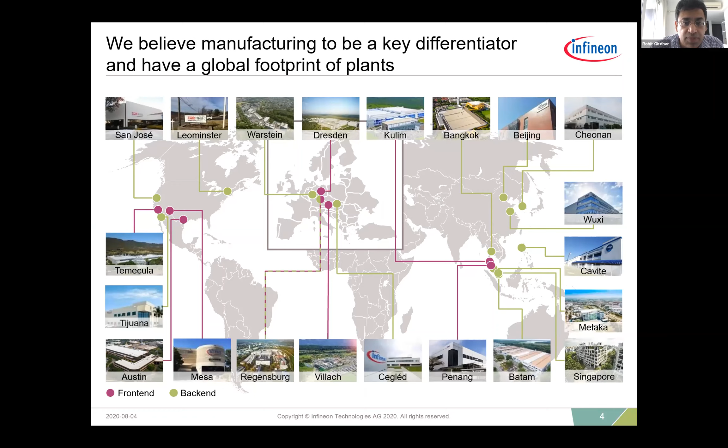We added a lot of corporate functions, we added a lot of support functions, design activities, but also increasingly our manufacturing setup in Singapore became more and more cutting edge. Over the last 5 to 6 years, we have actually invested significantly in manufacturing in Singapore, which has brought about a lot of usage of robotics, automation, AI, and digital tools.

And going forward, this trend is expected to continue because the Singapore plant for us is actually one of the lighthouse plants. And it's the only factory of its kind which is actually used for testing microcontrollers for automotive applications.

Next slide, please. And I think for most of the entrepreneurs and startups on the call, Industry 4.0 is not new. Everyone knows that the world had previously undergone 3 industrial revolutions, beginning with the application of steam as a source of power, to the assembly line, which was invented in the US by Henry Ford, and then moving on to computers, and now the 4th industrial revolution.

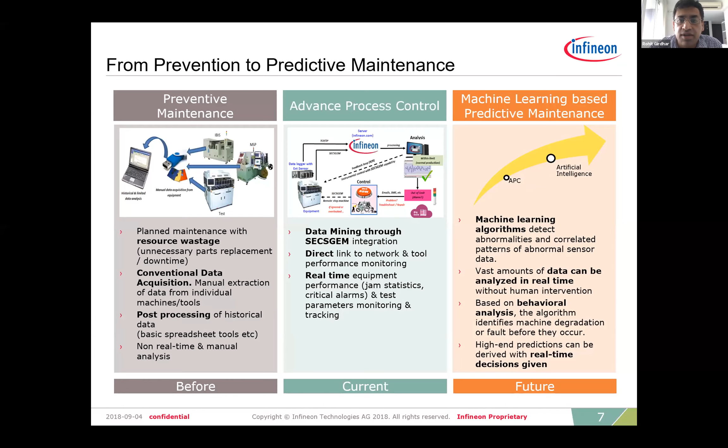And to now, basically, where you are beginning to leverage even more predictive tools, you're leveraging the power of AI and so forth. And these are actually real live examples in our factory. So this is the first one. It's an example more from the software side of things on how we are leveraging software tools and algorithms to help us better this. Next slide, please.

And this is another example, again, from our smart factory here in Singapore. So this actually shows you all the various ways in which the shop floor itself has been transformed. So you have a variety of technologies which have gone into this space in terms of automation, whether it's material handling systems, moving things from arrival all the way to our factory floor, or whether it is actually motion on the floor itself. There's a lot of automation technologies which are now built in. And this is also another interesting example. Next slide, please.

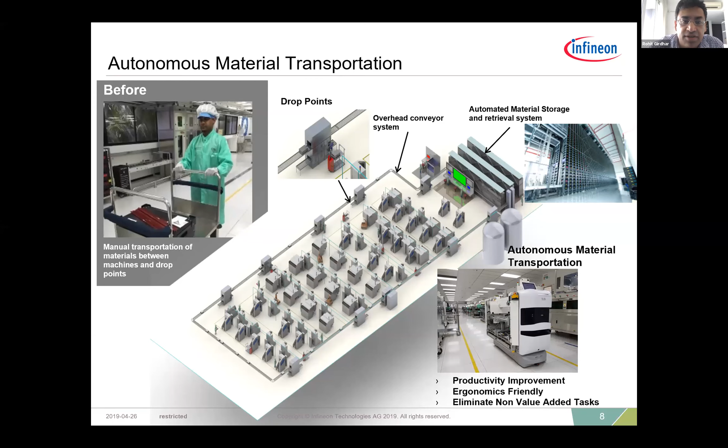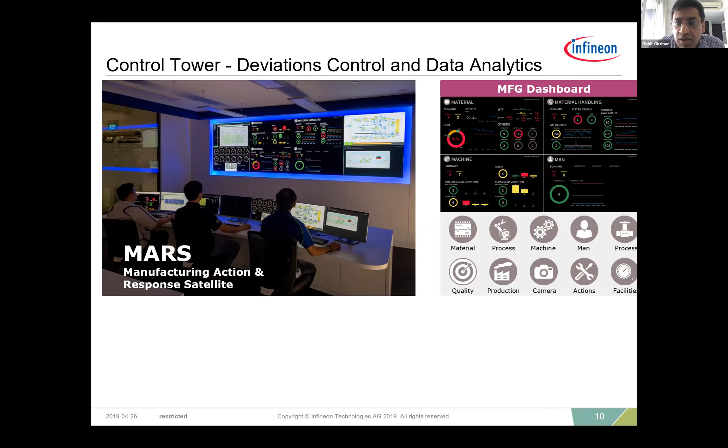Next slide, please. And this is actually something which we are incredibly proud of. This was actually put together by the team here, and it's unique for Infineon among its facilities worldwide. It almost looks like an airport control tower. So it basically gives you real-time information on a variety of metrics, how things are doing, what is going right, what are some of the potential flaws which are occurring, and all this in real time.

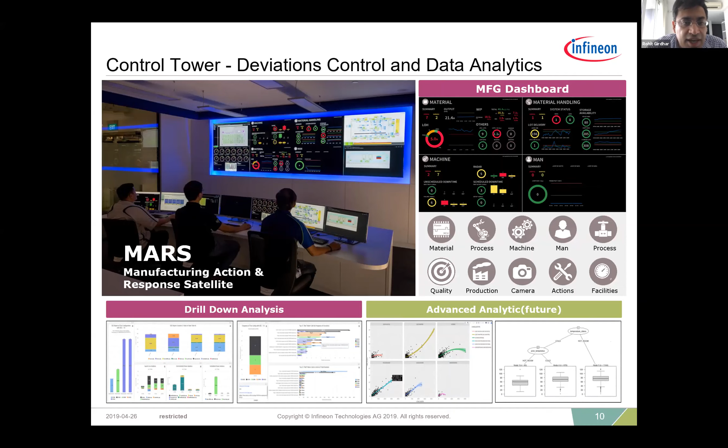So it's a dedicated setup which we have here, and it relies a lot on sensors and requires a lot of data being fed in real time. So it's a combination of hardware and software systems. Next slide, please. Right, so those were 4 examples of some of the ways in which a smart factory operates and how technology is being used to improve processes, to improve material handling, to improve communication, and also to improve monitoring in real time.

So this is an example where a partnership has occurred between Infineon and a local startup called 6th Sense. Next slide, please. And this is an example which is more on the hardware side. So actually what you see here is Infineon working with 3 different partners. One is obviously Xnergy. Xnergy is also a local startup here, and it makes very highly efficient wireless charging solutions. And these solutions are used for autonomous guided vehicles on manufacturing floors. So that was one of our partners which has been working with us on this.

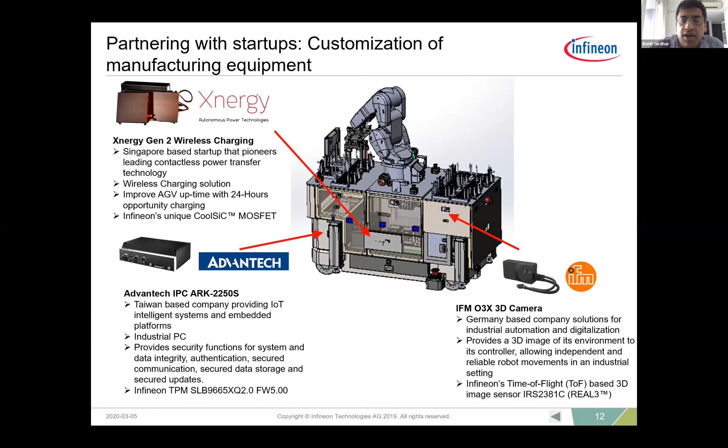Right, and maybe you could click through. Yeah, so more broadly, for those from the startups who are on this call, how does Infineon engage with startups? Yes, the technical part is one aspect, but how do we actually get to that partnership level? Well, there is a step-ladder approach which Infineon pursues. We are not so focused on investing in startups. We feel that is something which is better done by financial investors as well as by venture capitalists. So we focus more on enabling startups through partnerships.

How does this begin? Well, it begins on the lowest level where we engage with a lot of incubators and accelerators, and we introduce our technology. We do seminars, we share know-how, to more involved partnerships where we would then jointly define projects with a few selected startups. These may actually be either paid pilots, or a mutual exploration of topics. And last but not the least, as we go to the highest level in this step ladder, we have our own space here in Singapore called the co-innovation space.

So in this model, actually, the startup which is working with Infineon moves into our space for a period of a year to slightly more than a year. It could even be 9 months in case it's a very short project. We work together on a mutually agreed plan with clear milestones, and the startup actually stays in this space so that they have very good collaboration opportunities with our engineers.

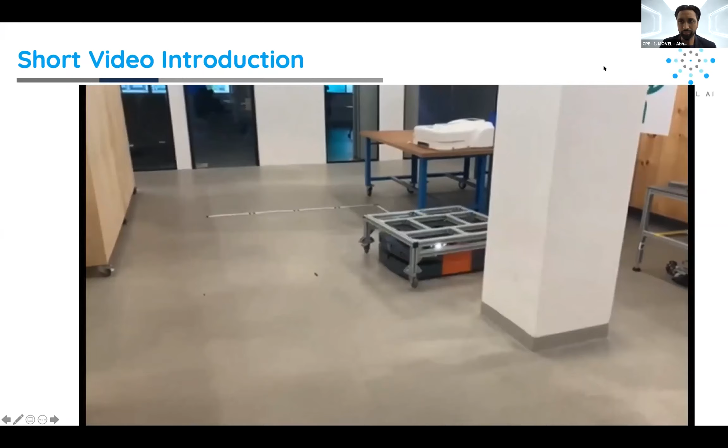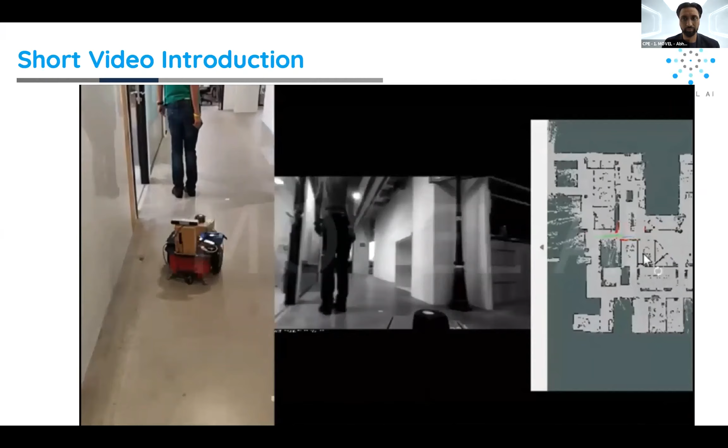In this section, green dots represent the objects which were there previously, whilst blue dots represent new objects just like this person. From these dots, our system extracts a pattern and defines a shape for each object. Once combined, you can see the robot in action on the left, the camera map in the middle, and the LiDAR map on the right. Initially, the robot avoids the obstacle by moving to the left, but now, when there's a glass wall on the left, it moves to the right as there is no space. The robot stops if the destination is occupied.

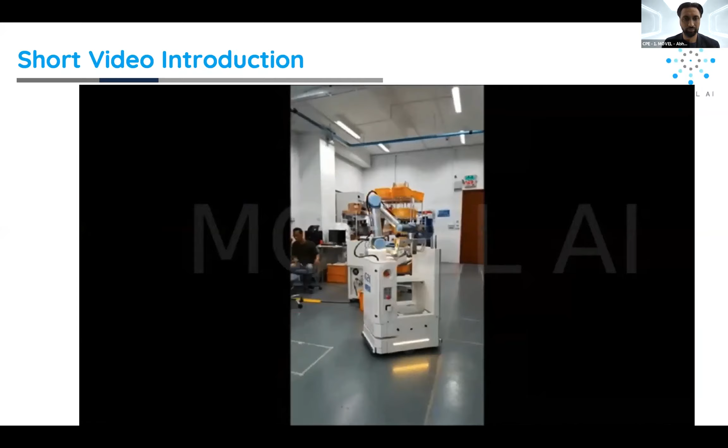Here's an example of our customers who have used our solution for robots operating in the wafer industry, where the environment is dynamic and accuracy is paramount. We have worked with clients in the hospitality and service industry.

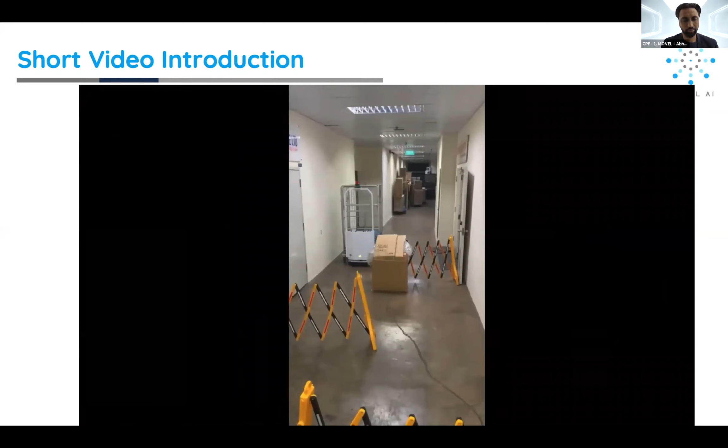In this video, the robot was assigned to go to different rooms to deliver items. The robot is able to dynamically avoid people even if they suddenly jump in front of its path. No matter how rough, dynamically changing, or narrow the path is, our navigation system can navigate any robot, big or small, to the destination.

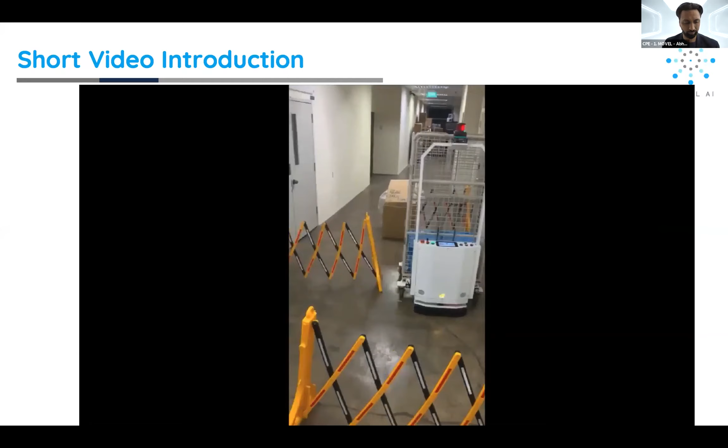In this video, you can see a series of obstacles, and the robot generates a smooth path to avoid them. Our unique sensor fusion algorithm using computer vision and LiDAR allows us to identify different objects. It dynamically switches reliance between different sensors based on the surrounding environment.

So robotic navigation technology has been there previously as well. People were using 2D LiDARs or line following, and some of them are using pure camera. There are some different issues with that. Suppose you are using line following, it cannot do obstacle avoidance. If you are using 2D LiDARs, it cannot work in dynamically changing environments.

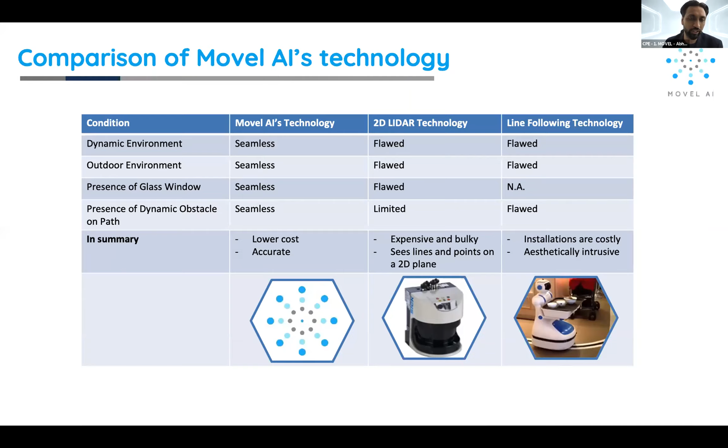Because we are using sensor fusion, we are able to overcome all of these. Not only that, we are able to use camera plus LiDAR. Because of the camera, we can get the shape and size of the human being, and if you want to follow the human being, we can do that. Secondly, we do not need any infrastructure changes, which means that we can extract the features from the space itself.

Our software is called Sirius, named after one of the constellation stars used for navigation. When we provide the software to our hardware robotic companies, they get a navigation system. It can handle glasses. It can handle multiple maps, multiple floors. It can detect obstacles, and it comes with a very good user interface. Because of this, it becomes very robust to be used in many different segments.

It is quite accurate, with an accuracy of about 2 centimeters. We are doing everything on board. We are not doing anything on cloud because of latency issues. We have optimized the code in a way that everything runs on the processor, and our software can be put on any kind of robot. That gives us a variety of markets to open into.

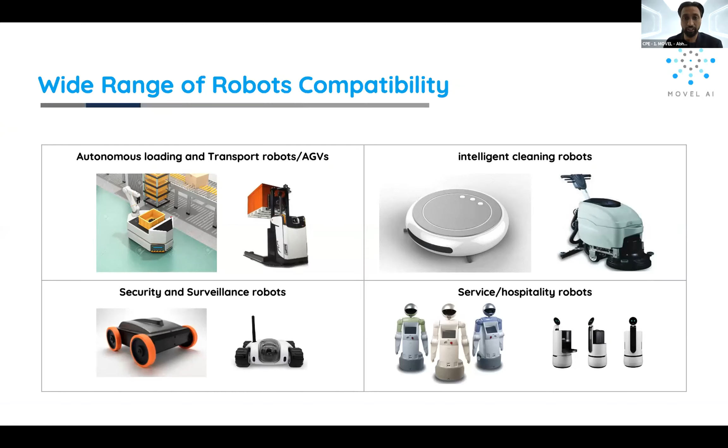Our software can be used in transport AGVs, cleaning robots, security robots, and it can work with service robots. We'll give you an example of how it has worked. Currently, we can work with robotic companies who have no navigation systems, who are working with magnetic tapes, or have some camera systems. We are also partnering with sensor companies to provide our software with their sensors, and working with end users and partnering with hardware companies to give a whole solution altogether.

Normally we charge a one-time integration cost, and then there is a licensing cost per unit. There are cases where there is no need to pay the integration cost also. If your system is ready, you can just take our software, ready to install. From our past clients, we have worked with robotic companies as well as end users and provided solutions to both of them. Currently we have about 14 full members working on this, with a heavy focus on software development.

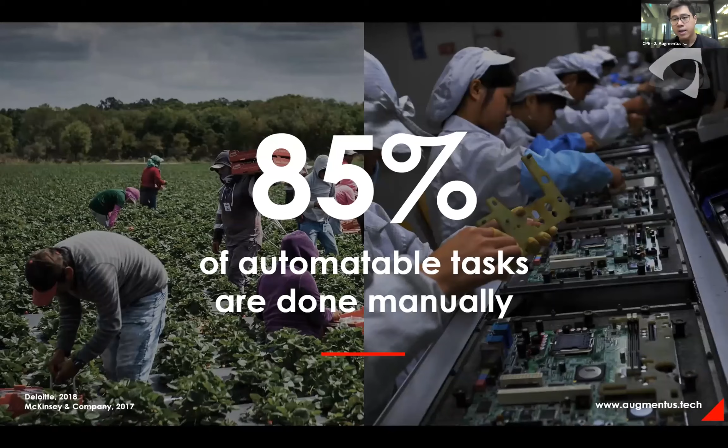Imagine that you want to adopt a robotic system. First, you have to purchase hardware and handle maintenance costs. But most of the cost actually stems from the software and integration side, and that alone can cost over $230,000 over its lifetime. The reason for this high cost stems from four key aspects. Robot programming software, like OLP software, is very expensive and requires high levels of technical expertise to operate. So you will need to hire or outsource robotic development.

Furthermore, different robotic brands use different programming languages. In fact, there are over 30 different programming languages in the market today. And CAD files required for programming are not always available, so you need to outsource CAD file development. That costs thousands of dollars per part. And lastly, if you would like to have intelligent-based dynamic automation processes, it's currently a very fragmented and complex procedure.

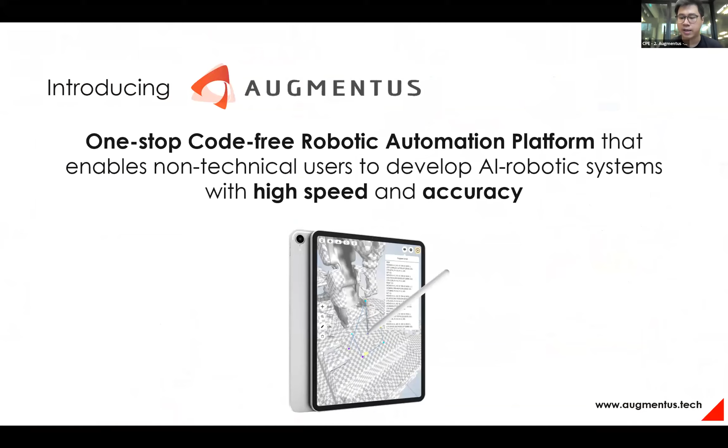Introducing Augmentus, a one-stop, code-free robotic automation platform that enables non-technical users to develop and operate AI robotic systems with high speeds and accuracy. We are a full-stack platform that simplifies and unifies industrial automation. Our software runs entirely on an iPad, eliminating the need for bulky and costly computer systems, and running on ROS. We are hardware interoperable, allowing the user to operate different robotic brands and equipment seamlessly.

We have an easy-to-use industrial robot programming UI/UX, enabling code-free robot programming with high accuracy through mixed reality. And our ubiquitous cloud architecture enables users to collaboratively and remotely develop and deploy systems. And lastly, our integrated AI model builder allows for easy development of AI inference models for intelligent-based dynamic automation systems.

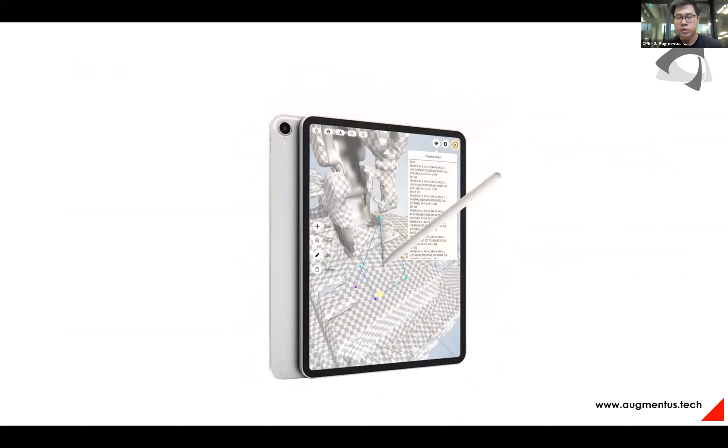So this is what our software looks like. Through the software, you'll be able to draw robot paths over the component instead of coding to generate the waypoints, which you can adjust accurately. Then it generates the code for you to edit and verify. And then you'll be able to simulate how the actual path planning looks in a real-world setting.

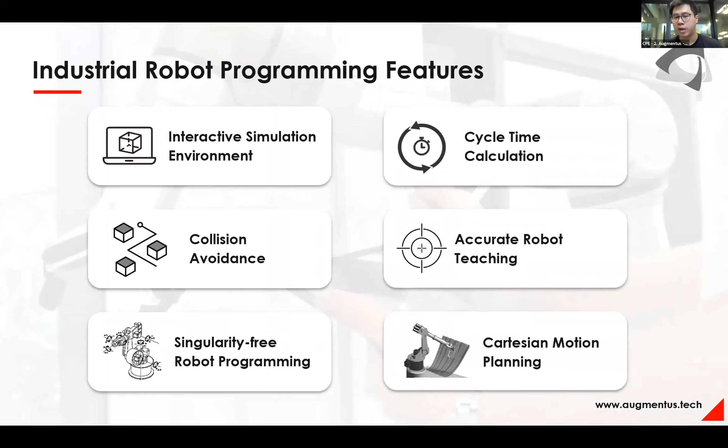Furthermore, we support robust industrial robot programming feature sets, such as an interactive simulation environment, cycle time calculation, collision avoidance, accurate robot teaching, singularity-free robot programming, as well as Cartesian motion planning, which are integral for applications such as spray painting, welding, cleaning, polishing, and deburring.

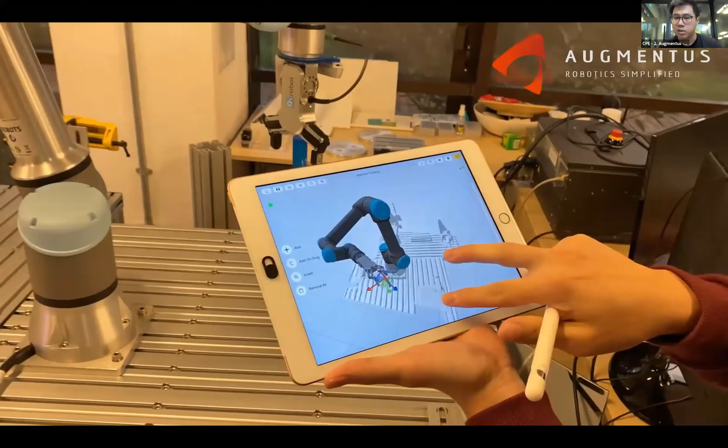Here's a short video that demonstrates how our software works. As you can tell, the user can navigate and fluently see what the workspace looks like in 3D, and is able to program the waypoints in a very fine-tuned manner by adjusting its parameters and its I/O inputs. After he adjusts the waypoints, the software generates the path, drastically reducing programming and development time.

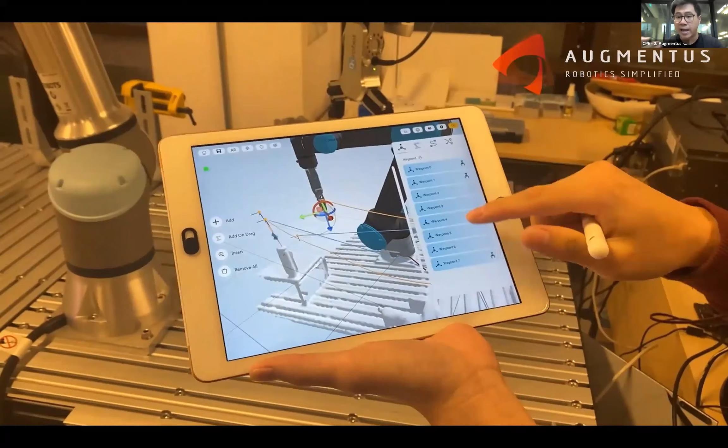After he generates the path, he will be able to see the waypoints and also see what the code looks like to edit and verify, and then simulate the path, as you can see in the video here. After he simulates the path, he'll be able to immediately deploy it live on an industrial robot.

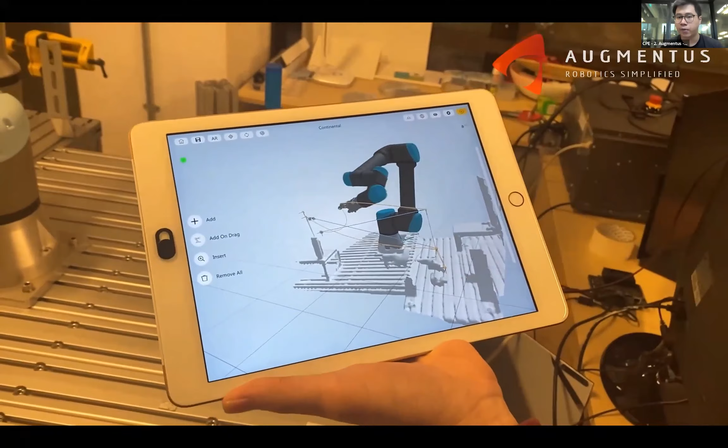This software is also ideal for applications that require very high accuracy and very low tolerances. As you can tell in the video, this application mimics a welding application that has very low tolerances as well.

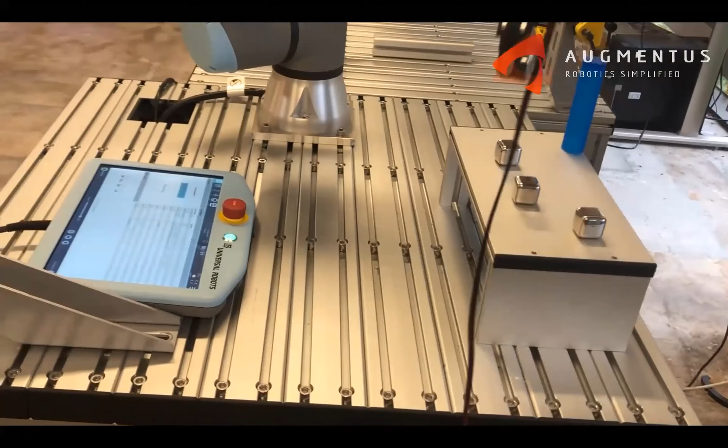And if you like AI model development, our software does it as well. As you can tell in this video, the robot detects the metal cubes and then picks and places them there. And even with external interference, it's able to detect the metal cube, the height and the depth as well. All this is done code-free on an iPad, and all these applications were done in under 10 minutes.

Our clients using Augmentus have experienced 60% cost reduction, 17 times faster programming, and 10 times faster deployments. For projects, we work closely with system integrators and hardware manufacturers to develop and deploy robotic systems 10 times faster at half the cost, and operators are able to easily reprogram and redeploy robotics for high-mix, low-volume applications.

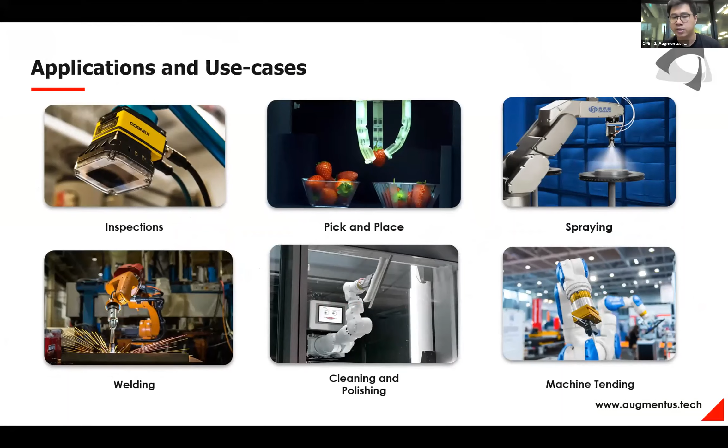And we support a wide variety of applications and use cases, such as inspection, pick-and-place, spraying, welding, cleaning, polishing, machine tending, and so on.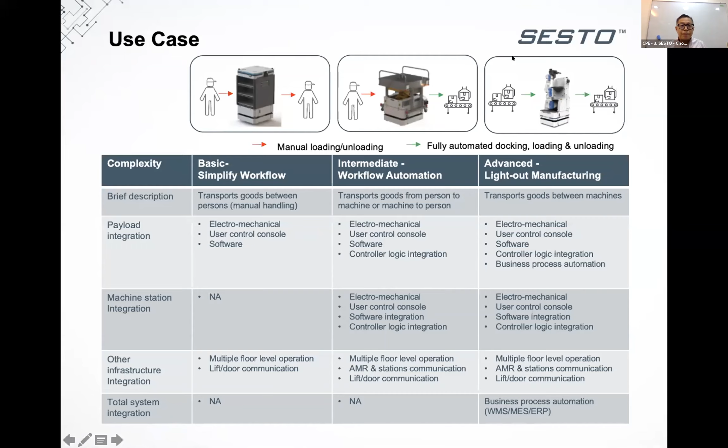Our service team is also based here, servicing our key customers in Asia, where we do deployment as well as preventive maintenance.

So in terms of value proposition, I won't have time to go through all of them, but one of the key features is that many of our customers operate 24/7. So we have a hot swap battery system, which allows the battery to be taken out when it's fully or partially discharged, and to insert a fresh set of batteries. That process is 5 minutes, and then it allows the robot to be up and running and basically working around the clock.

So this is a lineup of our products. We have Sesto Prime, where we integrated a 7-axis robot arm to our mobile platform. This automates the handling and transfer of FOUPs in semicon fabs with the highest payload of 20 kg compared to our competitors. Our flagship mobile platform is called Magnus. For its compact size, we have the highest payload for our form factor of 300 kg, and it integrates easily to different payload applications.

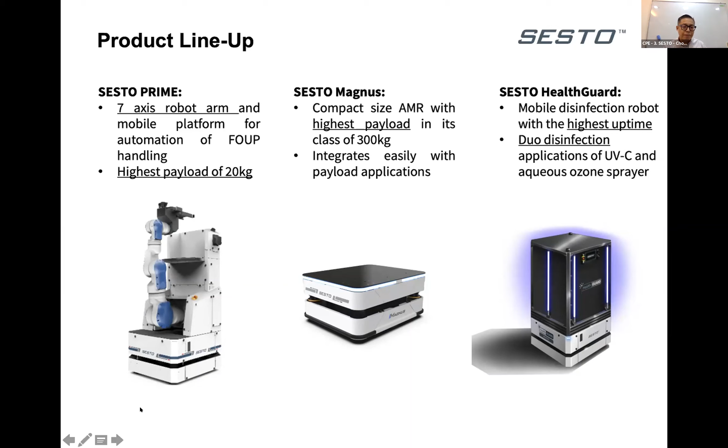So we are delighted to work with any partners in terms of exploring new applications as well as new markets.

I'm Wang Fei, CEO and co-founder of AeroLion Technologies. As you've seen from this first page, we do drone technologies and apply the technology to mostly industrial applications. Today's focus will be on one of our products, called the BlackLion-068, which is an autonomous warehouse stock taking solution. Compared to the previous startups, I think this is a bit unique in that it's three-dimensionally flying.

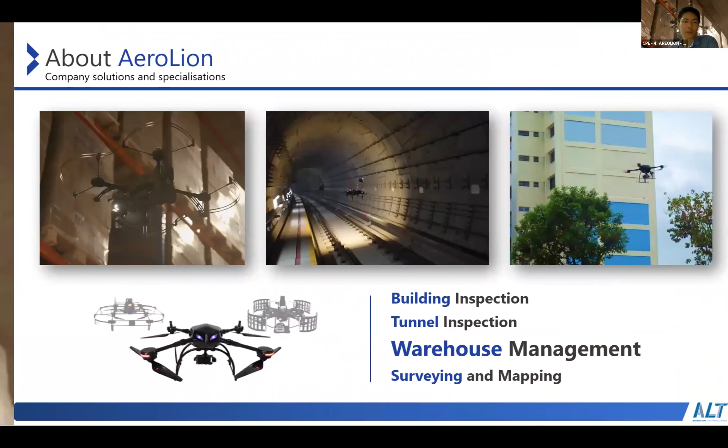About AeroLion, we enable UAVs to have the intelligence to do a lot of industrial applications. Our focus in Singapore is building inspection, tunnel inspection, warehouse management, and survey and mapping. Due to the limited time, I'll go to the warehouse management portion.

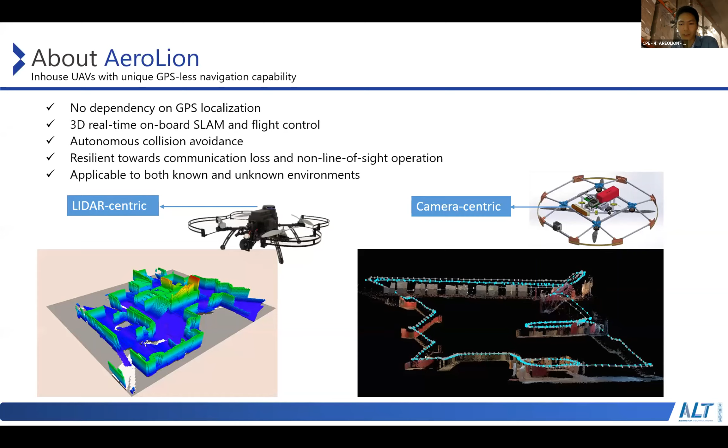Today's topic is all about navigation and autonomous navigation, but we are unique in that everything is computed on board the drone, and the drone is flying autonomously in a three-dimensional space. We also have navigation technology applicable to both unknown and known environments. There are not too many limitations to where it can be used.

The main problem statement is warehouse stock taking. As you can see from the center of the slide, the conventional way of doing stock taking is very tedious and very boring, with a lot of human-to-human interaction and human errors. But if you use a drone, it is autonomous, very light, mobile, and a very consistent result will be obtained.

This is enabled by our BlackLion-068 product. This is a full product now, and we are in the stage of fully commercializing it in Singapore and Southeast Asia especially. The product is designed not only with intelligence, but also a lot of safety features to make sure it can really be used in a warehouse environment.

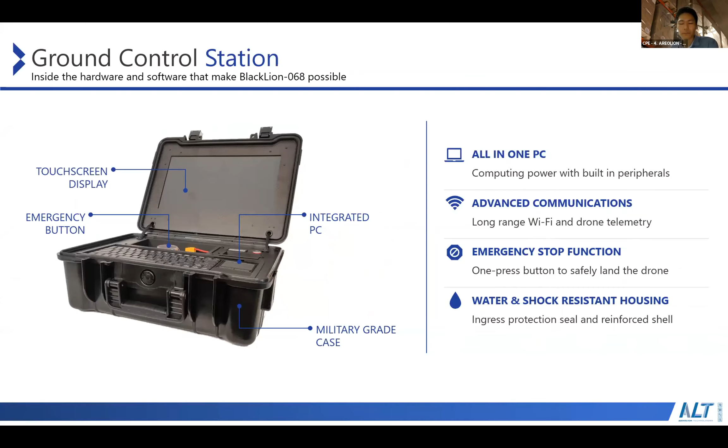Together with the drone, there's also a ground control station, which acts as a communication relay. The results are downloaded to this box, which can also communicate with the warehouse database wirelessly. The full solution has a lot of user interfaces so the user is able to configure the flight mission themselves. The first step is to use our proprietary software to draw and manage the warehouse maps and plan waypoints for the drone.

It is a very easy process, as a lot of basic things are already built in. After you set all the default parameters by building a row by column and layer by layer bins, all items can be replicated, and you can replicate the rows of the warehouse to tens or hundreds of them. The waypoint generation is also fully automated, including all the bin locations you want for the cycle count.

After the mission has been configured, you can upload the mission to the drone directly, ready to fly. When the drone is flying, it is scanning in real time all the QR codes or barcodes seen by the cameras at a very high FPS. The drone can work in a totally dark warehouse because there's active illumination on board. We've tested that the scanning result is 100% accurate.

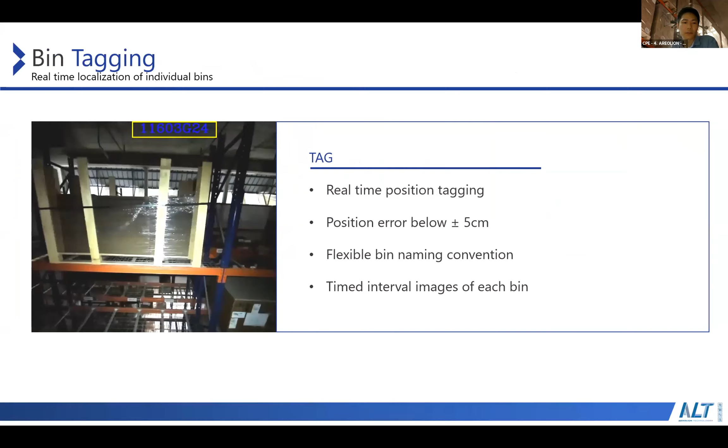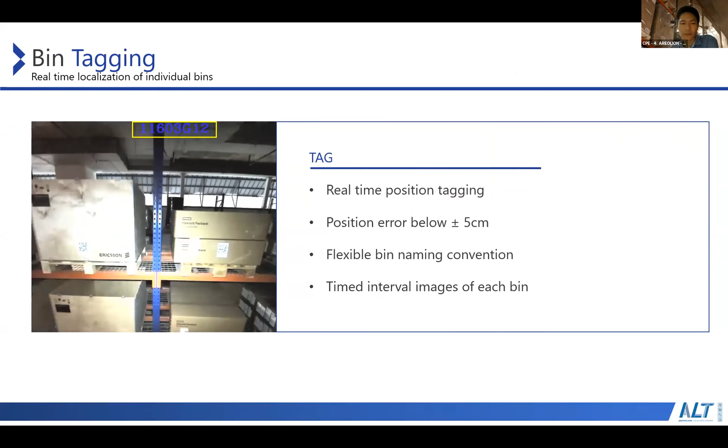Since the drone has navigation capability, the position of the drone is fully known. So you can map the position of all the tags to the bin locations of the warehouse, and generate the final result in Excel format or any format the user wants. There will be various bin location situations: cargo with ID, without ID, multiple IDs, or empty bin locations. They can all be automatically detected and accounted for.

With this solution, you can achieve about 16 times faster and cheaper than the conventional way. There's less energy spent and a much more mobile and light solution compared to manual data entry. And there are no errors, so the result will be very consistent.

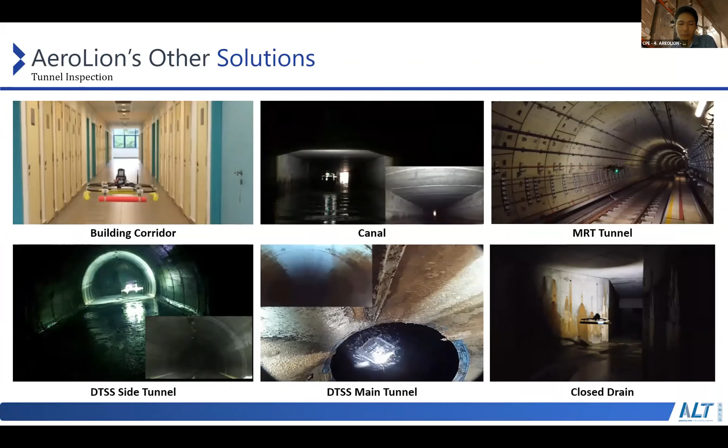AeroLion also offers other solutions like building inspection, briefly scanning through, and tunnel inspection. What's in front of you are our test cases of the tunnel inspection product working in all types of tunnels. They are all quite mature technology nowadays, so I think there will be a lot of applications.

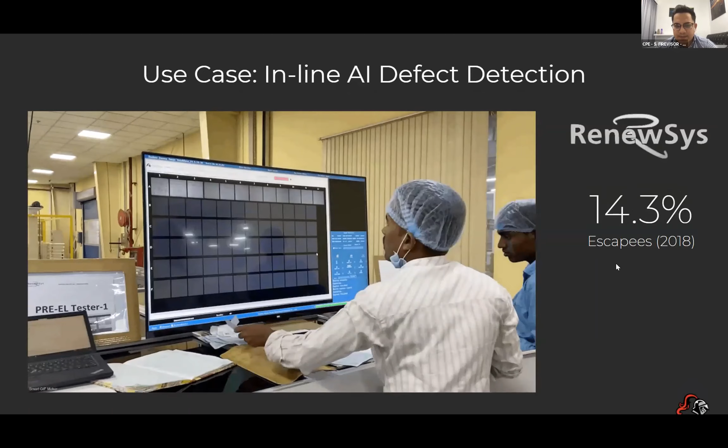So this is a short clip from one of our customers' factory in India. When we first deployed our inline software at their plant, they were struggling with a high escape rate of 14.3%. Their escape rate has been decreased today to 0.148%, and that's a staggering 99% improvement. Our second use case we would like to showcase today is a solar factory based in Singapore. When we first deployed our software at their plant, they had a high false reject rate of 70%. Thanks to our offline defect detection and analytics platform, we were able to save them 8,000 engineering hours and $600,000 in labor and scrap costs.

Our clients are large manufacturing companies in Singapore, India, and the European Union. And we currently analyze 1.2 million components every day. In addition, we are working with 14 large manufacturers, 2 equipment suppliers, 3 consulting and distribution partners in India, Singapore, Europe, and the United States of America.

So here is the team of all-stars behind Previsor Systems. Our CEO, Subi, has spent years improving industry giants like Micron and Seagate. She has built automation systems from scratch that save thousands in man-hours and up to 80% in cost. Our CTO, Long, has built machine learning models that analyze millions of transactions for outliers. He also designed data pipelines that scale to tens of billions of requests per month. I am Gabriel, the Business Development Manager, and we have teams in Singapore, India, and the Philippines. Different teams focus on full stack development, AI modeling, and R&D. We also have an upcoming team in Vietnam that's going to be focused entirely on R&D.

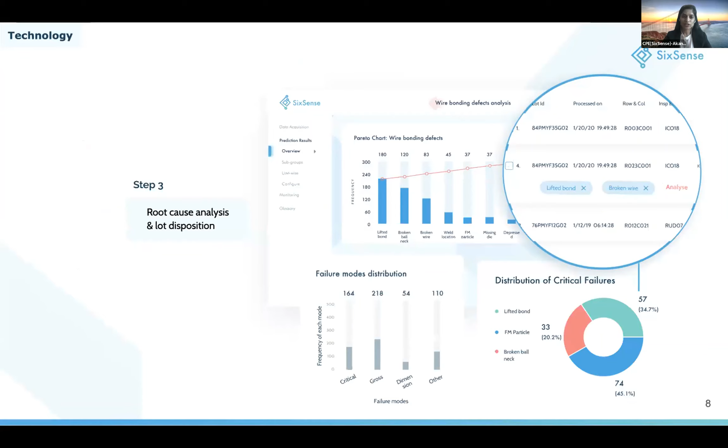Here are some of the global IDMs and foundries we are working with. And one of them would be Infineon. As mentioned by Melvin, we have been using AI to classify images of mechanical rejects on lead packages. This has led to a reduction in over-rejection by 40% by delivering a world-class algorithm with an accuracy of over 97%. Thanks, Melvin and team, for the smooth cooperation and progress so far.

SSIA's Voice magazine recently published an article on Global Foundries Singapore adopting Classif AI. What used to require highly trained operators is now learned and automated by Classif AI. We are heartened that Global Foundries is pleased with the results. And to quote Mr. Gu, VP and GM of GFS Fab 200 operations, Global Foundries is driving more of such initiatives across the company. And SixSense is proud to be an integral part of the journey.

So what differentiates SixSense? First, we have intelligent annotations that automatically label areas of potential defects. Second, we require 10x less data and provide up to 30% improvement in accuracy. Third, our AI solution constantly updates, capturing instant data shifts. And finally, we assist in seamless integration with all relevant machineries, resulting in a single source of truth for management to gauge defect-related performance.

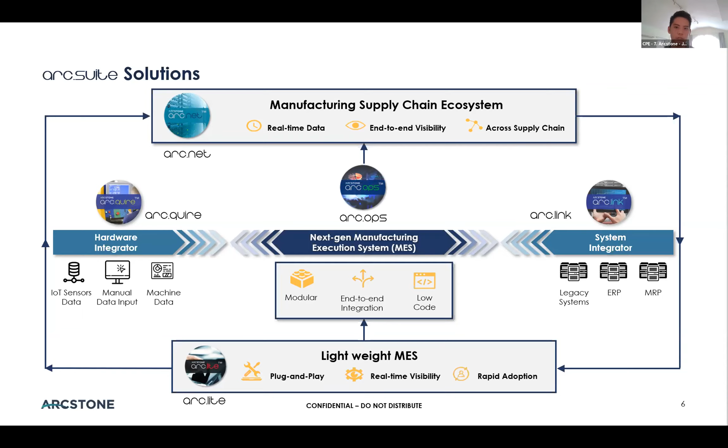In summary, Arcstone's suite of solutions are really focused around building a digital manufacturing ecosystem for our customers and providing visibility, control, and optimization from the production floor through the supply chain. Our clients have gotten significant benefits such as cost reductions due to man-hour savings, decreases in scrap rates, optimization of inventory, higher throughput, and other benefits.

And leveraging these solutions, Arcstone has grown into 8 different countries. We have over 100 deployments of our software, thousands of users, and hundreds of millions of dollars of equipment assets that are maintained and managed by Arcstone's solution set.

So if you're in Singapore, we would love to host you at the ARTC, the Advanced Remanufacturing Technology Center, where we're a Tier 1 member and we have all of our solutions on display in a model factory setting. We're happy to provide live demos of our solutions, as obviously it's much easier to see the solutions in action versus on a PowerPoint.

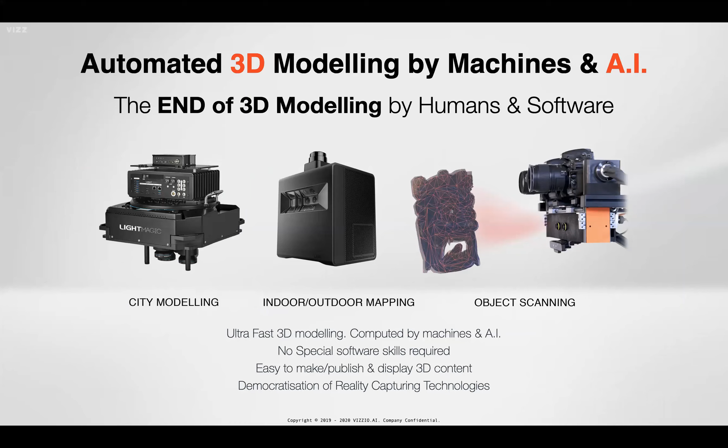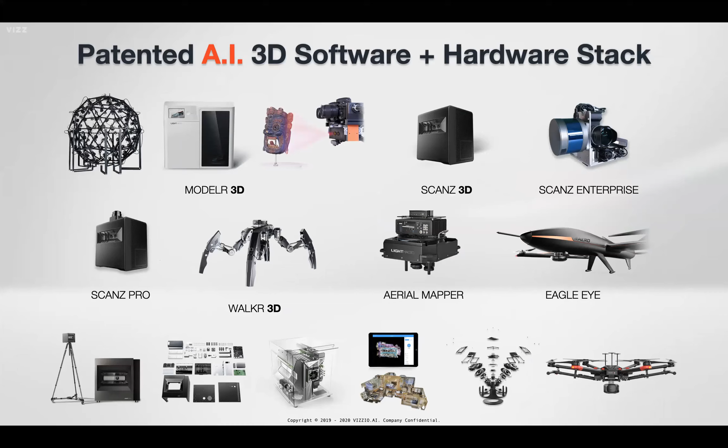Once these scanners capture the point clouds and the data, they will send it back to the server to do the heavy processing into models. So essentially, we are calling it the end of 3D modeling by humans and software. It will be automated by machines and AI. So these are the category of devices that we have created over the last 3 years in China. And we are backed by 512 patents that we have filed with USPTO in the last 3 years.

So the whole processing end to end is that you capture the data from all these scanners on the edge, scanning objects, mapping indoor and outdoor space, or modeling a city. And then you send the data back to the server to do the heavy processing into models. So imagine the server is like a server farm of your 3D modelers doing the modeling work for you.

And then we will output them across a plethora of devices like PC, desktop, tablets, and AR and VR. So this is the server farm we have in Singapore. It's actually doing the automated 3D modeling by machines and AI. So let's put it into perspective: 100 square kilometers of a city model map, we can compute the models in two days.

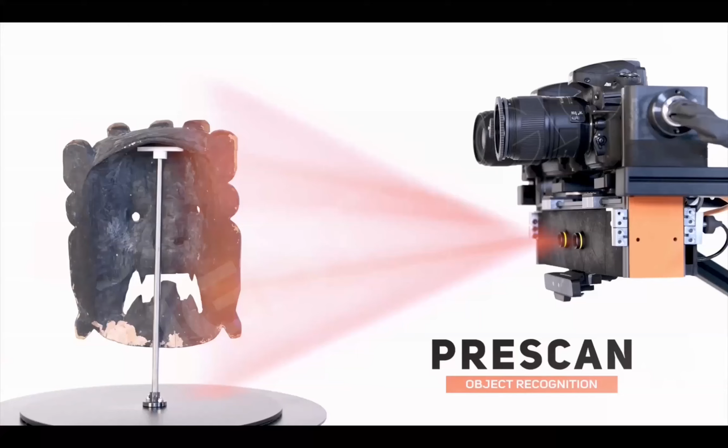A 10,000 square meter indoor and outdoor map, we can come up with a high-fidelity model in 2 hours. So let's give you a quick example of how we scan. This is how we scan objects. It can be objects of any size, a small object or as big as a tank or aircraft. After we scan, we run through a real-time rendering process. It runs through a graphics engine pipeline, and it creates all these high-fidelity models for you.

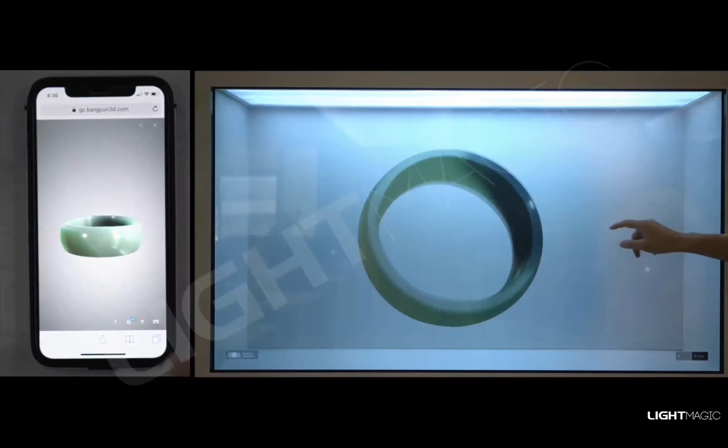So just imagine it being used for an industrial manufacturing process. You have a lot of equipment you want to scan. You want to create a digital twin model of all this equipment and stuff in the facility. So we have an ultra-fast way of capturing, scanning and rendering, and making it interactive 3D across all devices.

And then this is another category of devices that does the indoor and outdoor mapping. So instead of having humans measure with laser beams, we can map out the whole entire factory floor; if you give us 10,000 square meters, we can do it in 2 hours. The models will come out not just as a 2D floor plan, not just a 3D floor plan, but a high-definition 3D polygon model that you can do a virtual tour like this, right?

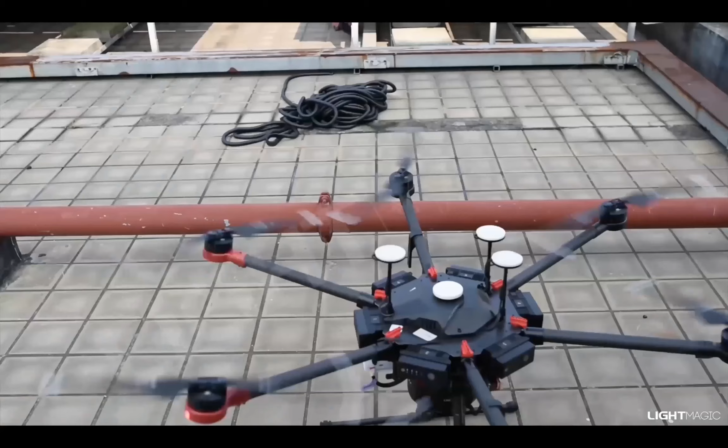And this is a device that we use to map; we build the optics underneath the drone. We don't build the drone, we build the optics underneath the drone. And the drone will go capture a lot of point cloud and a lot of photographs. Those images will be fed into a machine, and then we will map out the whole city models in 3D. Over time, we have created a 3D model of Singapore, but the 3D model of Singapore was not computed by drone, it was computed by satellite. Okay, I'll give you a quick show.

So Vizzio essentially is all about AI and 3D. We are creating 3D in an ultra-fast AI manner, and we are visualizing 3D across multiple devices and platforms. So with 5G coming, you're digital twinning your factory floor or your equipment so that you can plan all the IoT sensors and manage them from your command and control.

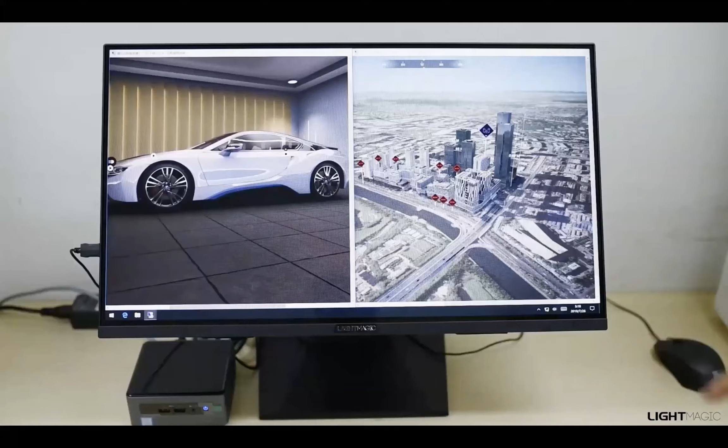These are the things that require heavy technology to quickly map objects, spaces and cities. So we could give you highly polished, interactive 3D models in 64-bit graphics, powered over the cloud and delivered across any device. Our model is also VR friendly. Just plug into a VR application. You can be immersive and walk around and see everything in 3D.

Right? So I'll give you a quick example of another modeling technique that doesn't require a drone. The left side is a model built by Virtual Singapore. I think they have spent some 3 million trying to build a virtual model of Singapore. And we have spent 2 weeks to already complete 92% of the Singapore model in high-fidelity 3D with 4K texture.

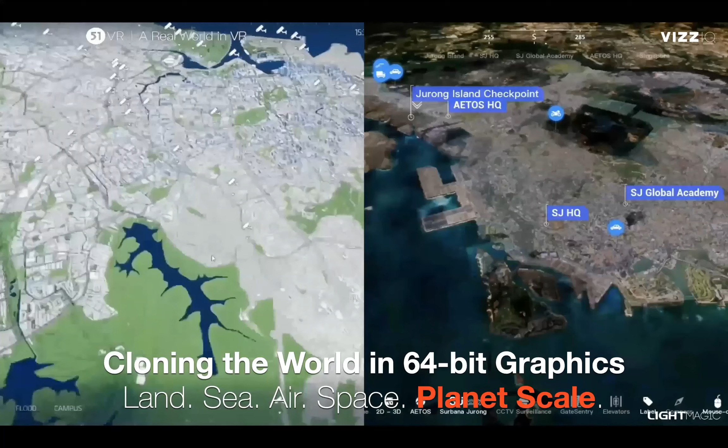So essentially you're talking about a massive modeling capability that can transform a lot of industries and give you digital twin models of cities, of spaces, of objects, done in a double quick manner. Right? So the right one is done by us. We have not employed any drones. It was all mapped by satellite imagery.

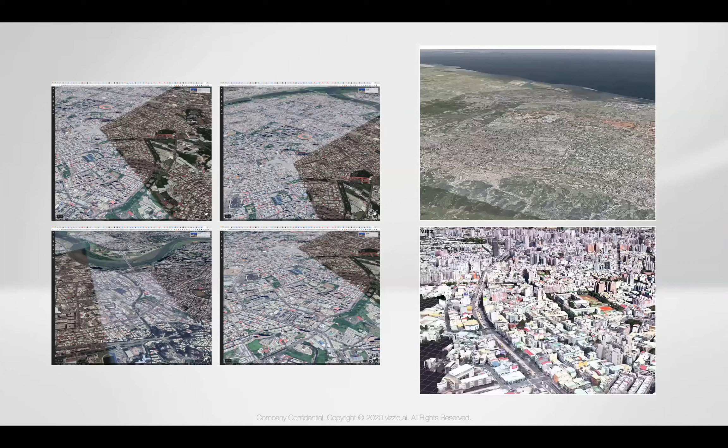So make a guess, this is Taiwan. On the left is Taiwan seen from Google Earth, a flattened orthophoto. On the right is a model of Taiwan that I've modeled through AI. So I have not flown a plane or a drone across, and I can get it done. This is done in 4K. It means literally I can model any city in the world without sending a plane across the country, right?

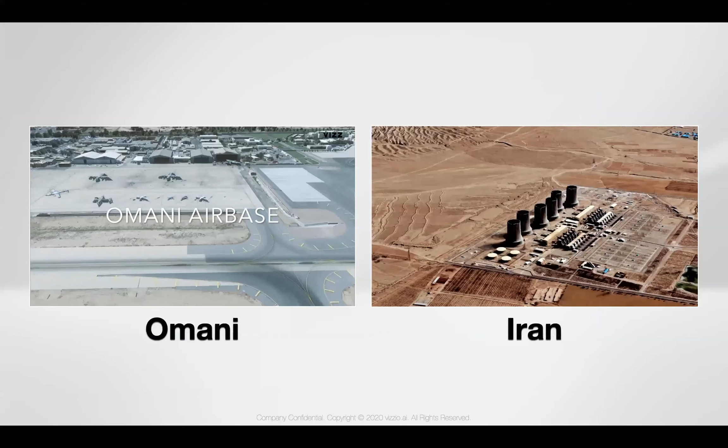This is a local project. We have AETOS, we are building the new command control center for them for the next generation digital twin. So we are monitoring all their assets and equipment and the construction site for Surbana Jurong and AETOS, all the guarded facilities and stuff. This is like a new next generation 3D map of Singapore. And we achieve 60 frames per second animation rate without any problem. So I'm going to scroll through.

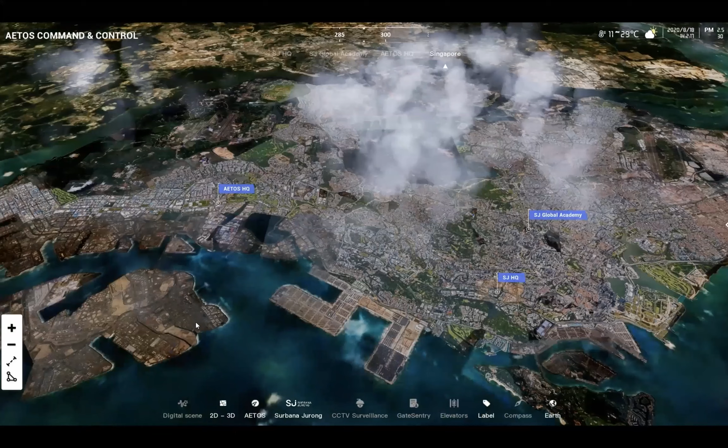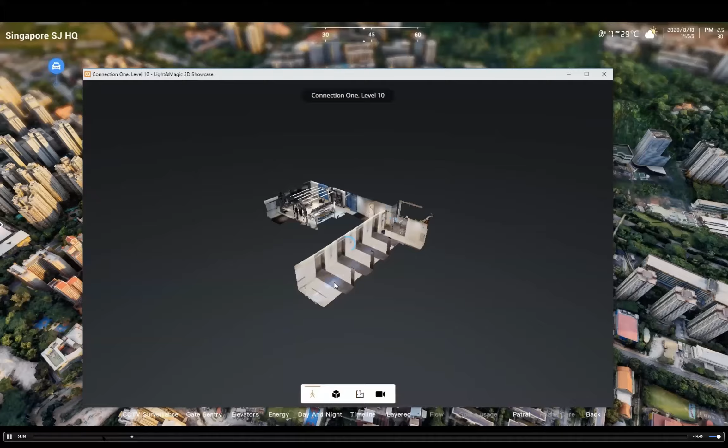So we are monitoring 24,000 HDB elevators, plugging in their IoT sensors and stuff, monitoring the status of sensors and everything, all done through a dashboard. So this is our biggest project today, 7,200 square kilometers of Guangzhou map, and we gave them BIM, point cloud, and mesh, everything. Right? Okay, so.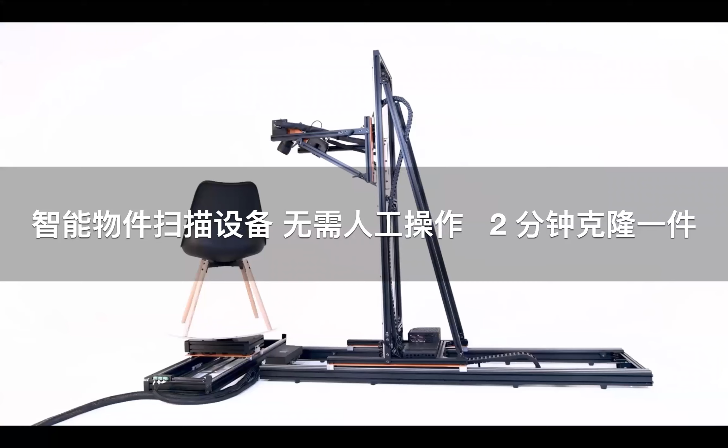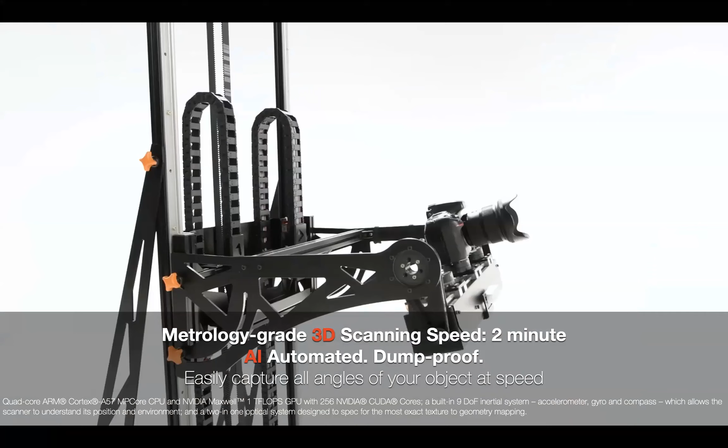This is how we scan equipment and how we scan machinery. It's all automated. Every 2 minutes, you will clone one object and everything is automated. And we have pioneered a new method. Take 15-second videos of the food or any object in front of you. Send the video to us. We will convert your 15-second video into an interactive 3D model, and that can be delivered using a browser link. Right? So there's no magic to it. 1 minute to scan, 3.5 minutes to process into a model.

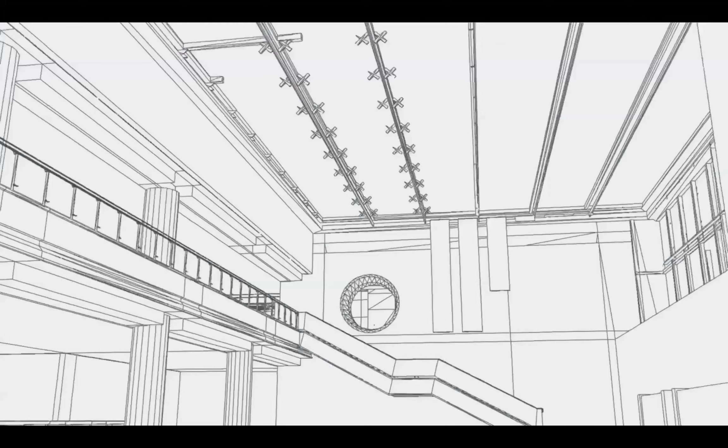And this is how we scan indoor and outdoor. We also created a small little consumer-grade equipment that you can bring around, and that will let you scan spaces and capture spaces, and then that delivers you the virtual tour. So you can have a virtual tour like that. Imagine mapping your factory facilities and plants and plugging it into your mission critical application, right? So we have this family of products that does the indoor and outdoor scanning.

So essentially, we're talking about digital twinning, creating models in a hassle-free way, in an ultra-fast manner, right? And then you can have 2D floor plans automatically created for you. 3D models are automatically created for you, all done by algorithms and machines. Right?

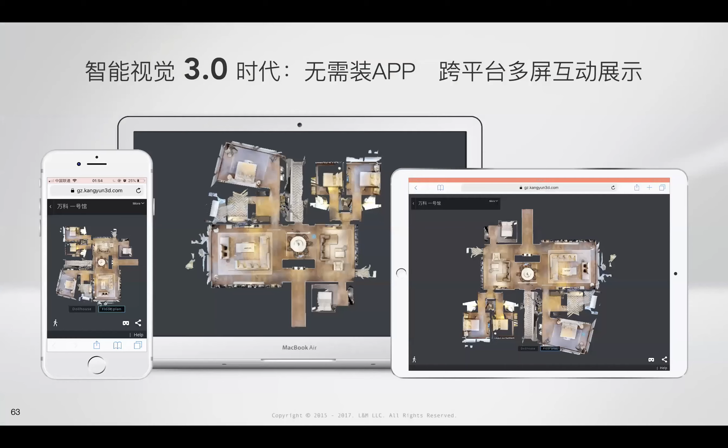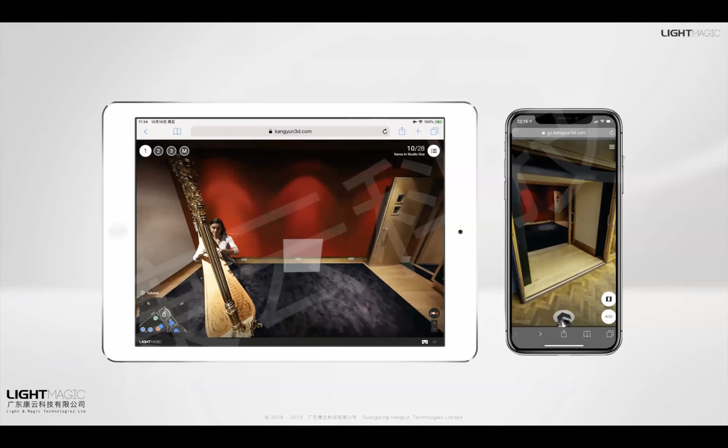So the other aspect of the modeling is that we can stitch live video inside our model. So I can roam around, walk around, see this video, see this lady playing a musical instrument, it's live. So essentially, you can plug security cameras into your manufacturing facilities, then you can have remote surveillance on the ground and do virtual patrol and stuff. So all this is happening in a browser, no apps to install. Right?

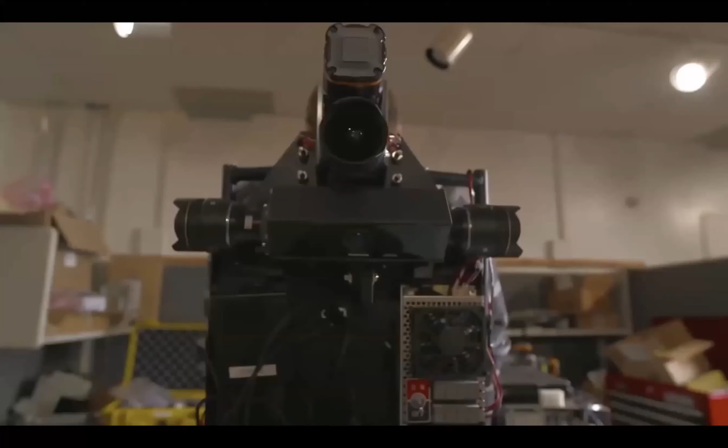Not just for, so you can see the realistic, these are not videos, these are all models. The streets, the roads are all mapped and automated by a special optic camera mounted on the vehicle, right? So then we put them into a simulator. So this is the first generation type. It is a backpack device, you mount it in a backpack and then you walk around and scan, but at the end of the day, we have already made it more advanced.

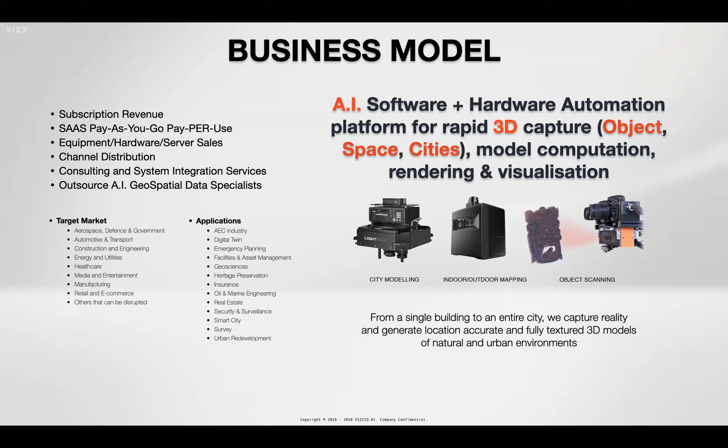Okay, so our business model is subscription revenue, we have not talked about hardware sales yet. We are pushing back the hardware sales to next year, but we are now doing a lot of projects in different sectors, from security, surveillance, healthcare, medical, smart city, urban planning, manufacturing, etc. We are backed by 500 plus patents, and so on.

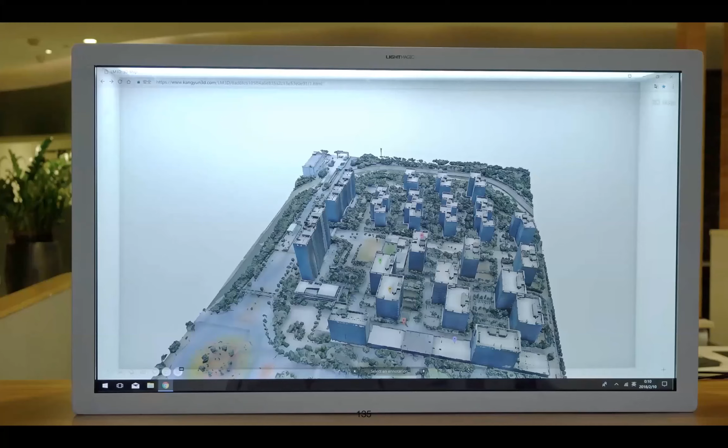Yeah, last part, the digital twinning of a factory. So we scan the factory, we make a digital copy of a factory. Previously, they needed 24 security guards to survey the grounds. Now with this, and live video integrated, they are doing virtual patrol. They're reducing the workforce by 60% to 40.

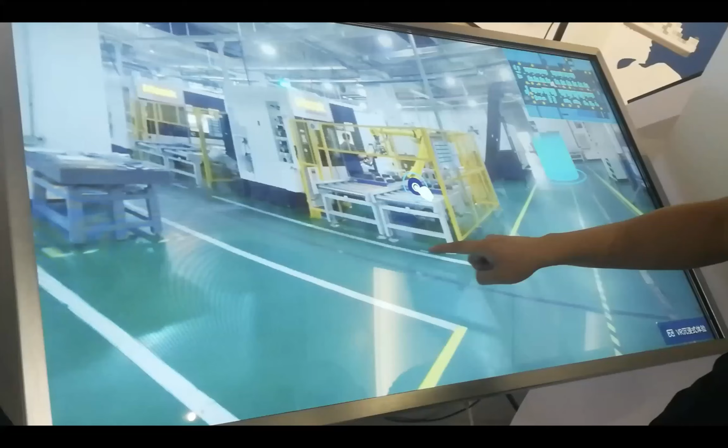And every piece of equipment you can interact with, click on it, explode, zoom in. When you want to read the readings, you can take the readings of the IoT equipment and stuff. Notice that the background people are moving and animated. It's not a static 3D model. It's a video stitched inside a static 3D model.